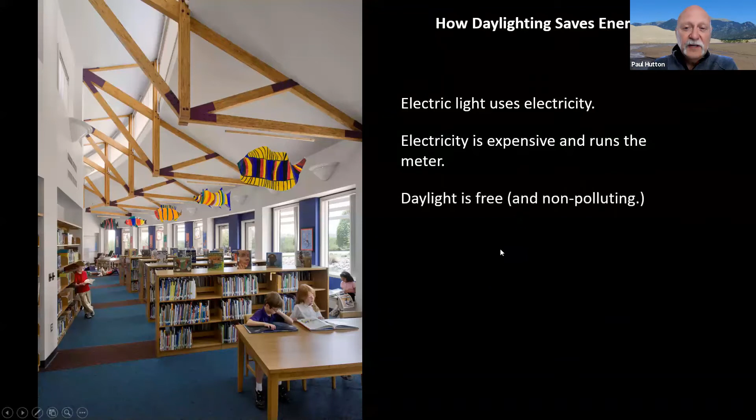Electric light is hotter than daylight. That's a key component, and electric light leads to more air conditioning than daylight. Therefore, the conclusion was that if we did good daylighting with controls, controlled glare and excessive heat gain, we actually could design buildings that were beautiful to be in and resulted in lower energy use. In fact, our typical attitude was that we could save, or hope to save, somewhere around at least 10% of the total energy use of a typical building through careful daylighting. We believe we had pretty good data to demonstrate that. So that is the attitude that I had when I began my career, and that I shared in training and teaching across the country.

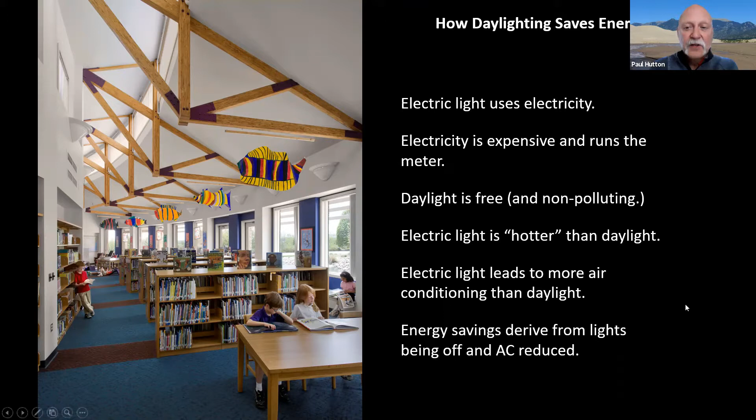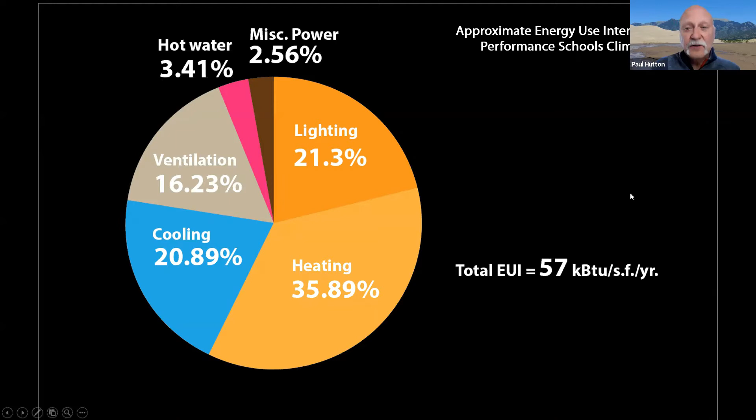So that's what we're going to take a look at today. Here is a pie chart of energy use, not from today, but from a high performance building many years ago, closer to when I was earlier in my career. We can see back then that lighting was a very significant piece of energy use in most buildings. It was almost always more than 20%, sometimes as high as 25% or higher, that went into lighting, and another fairly significant share went into cooling. So of course, if you could cut the lighting drastically through daylighting design and daylight harvesting, with corresponding savings on the cooling side, it wasn't too hard to imagine how you could get to a 10% energy savings in this kind of scenario.

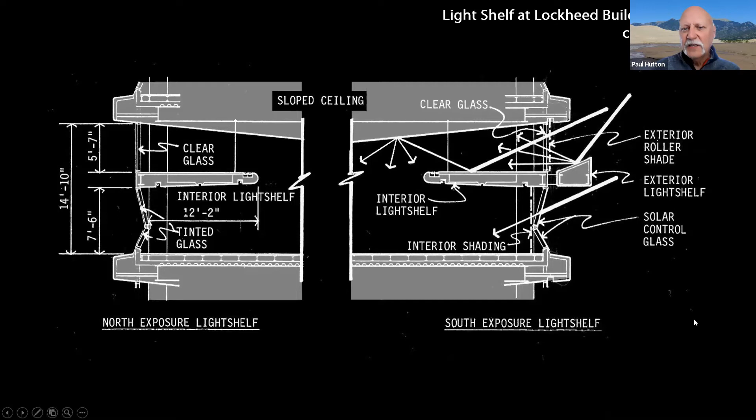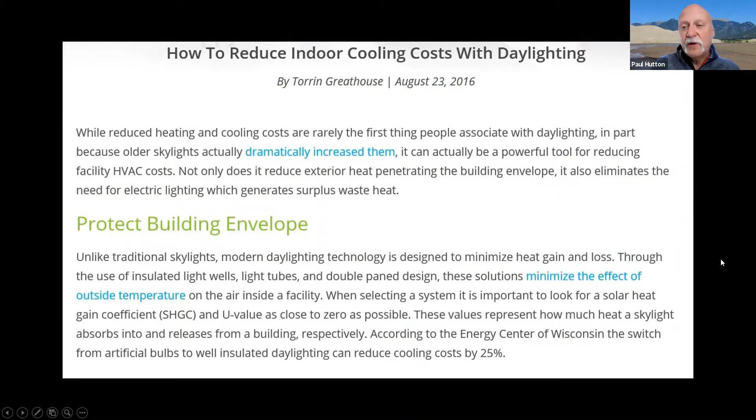So this is what we're wanting to ask: does this really make sense anymore? Embedded in our literature has been a lot of information about daylighting saving energy. This is just a small sampling of the thousands of articles you could still Google and find about daylighting and energy savings in buildings. I'm sure many of you on the call, if not all of you, have seen and come upon these kinds of things. I've been involved in writing some of these kinds of things myself, so I certainly understand the degree to which this has been ingrained in architecture and building design beliefs, that daylighting is a fundamental strategy, and it had been a fundamental strategy.

In fact, if we even look at the AIA Top 10 awards, really the cream of the cream in terms of sustainability design in the United States, what we find is that the designers in their own submittals are still using language that suggests a belief that daylighting is an energy conserving measure. It's still thoroughly embedded and has not yet been revised or updated the way we think it could.

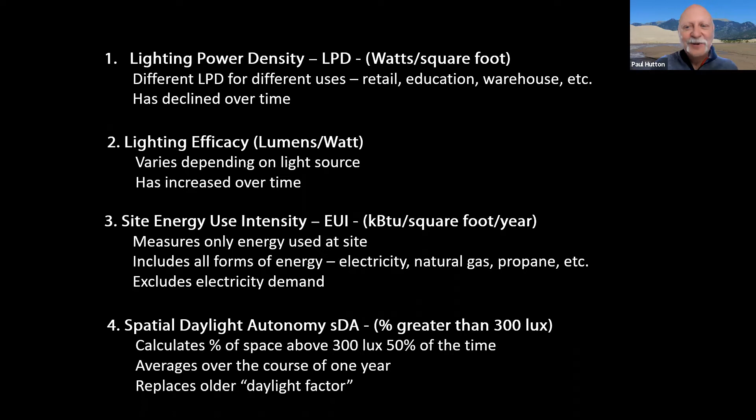So we wanted to mention that this is a slightly technical presentation. Some of it will get fairly technical, so just wanted to mention that there are 4 key terms we're going to use throughout this presentation: lighting power density, or LPD; lighting efficacy, measured in lumens per watt; site energy use intensity, or EUI; and spatial daylight autonomy, SDA. To us, these are fundamental terms that you need to understand to engage in a conversation around energy and daylighting design. If you're not completely familiar with these terms, we suggest you do a little background research. We're not going to take the time to go into in-depth definitions, just wanted to make sure you all knew that we'll be using these terms pretty freely and liberally as we go through the rest of this presentation.

So I'm going to take you on a little history tour. This was the first building that I was project architect and designer on, 35 years ago now. Because I still have the documents, I was able to recalculate lighting power density for this building, which was designed to be energy conserving. Back then, the most efficient we could design lighting with fluorescent technology was about 2 watts per square foot. Most buildings at that time used significantly more, but 2 was about the bare minimum for high quality lighting. That's a lot of watts.

Let's move forward in time, about 13 years later, to another building you saw earlier. Fluorescent technology progressed steadily through the years, not too rapidly, but it progressed. In those 13 years, we went from needing 2 watts a square foot to only 1.4 watts. Fixture designs got better and the lamps themselves offered higher efficacy, so we were able to move closer to 1 watt per square foot.

If we scroll forward a bit more—let me make sure I get this right—10 years after that, we went from 1.4 watts down to 1.2 watts. Again, just steady incremental progress in fixture and lamp technology.

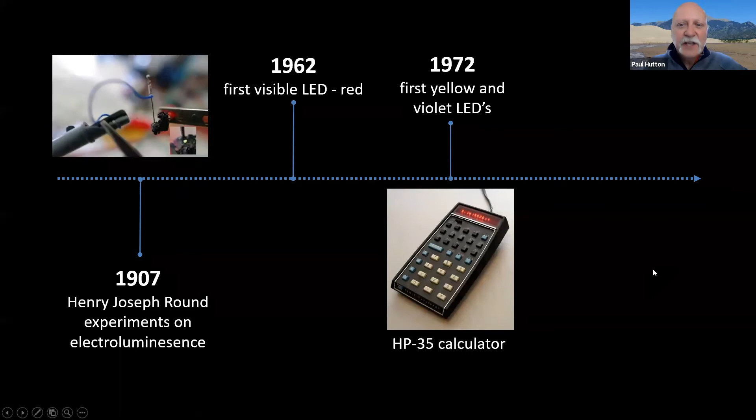Just a quick bit about LED history—I find this fascinating. Most of us don't realize the foundations of LED technology go back more than a century, to early experiments from 1907. The first commercially available application for LED was in those HP-35 calculators; I had one that got me through college. Some of you may remember those, or even had one yourselves. But when those came out, it never occurred to any of us that it would go from that tiny source of light to a source of general illumination like it is today. Pretty incredible, that rapid change.

One thing we like to talk about with lighting design is efficacy. Efficacy is simple: it's how many lumens are output for each watt that goes into the lamp. Here we see the historical development of typical electric lighting sources over time, moving from incandescent to halogen, fluorescent, metal halide, even compact fluorescent. They were all in a fairly narrow range of efficacy, starting around 10 with incandescent and just touching 100 lumens per watt at the very best of our older light sources.

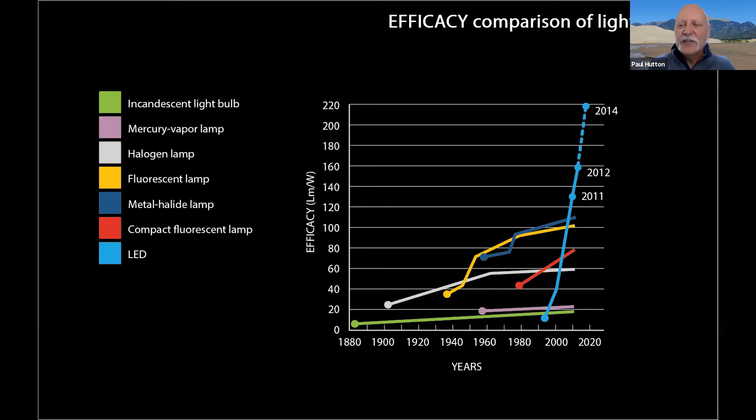But once we get to LED, we see that LED, in a blink of an eye in relative terms, went from not being as efficient as the current incandescent bulbs to nearly doubling the most efficient light source we have anywhere else. In fact, if we look at the theoretical limit, and who knows if that's accurate, but some people say this is a theoretical limit, it might get as high as 268 lumens per watt. That's an incredible level of efficiency.

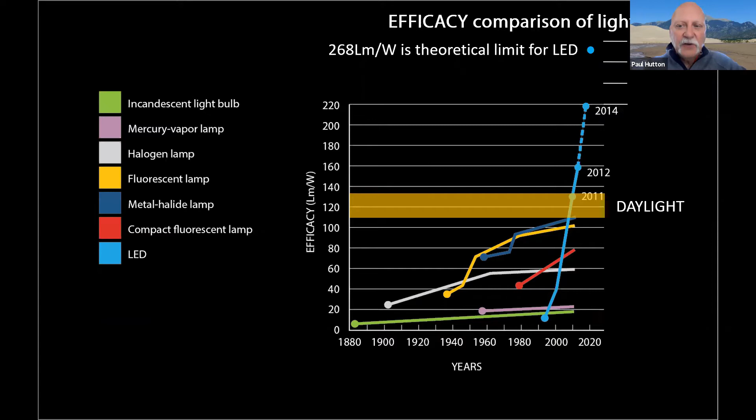And the really important point to make here is this. If we compare the efficacy of daylight, which we can do, to the efficacy of these typical lighting sources, we find that LED is the first electric light source that has an efficacy greater than daylight. That is to say, for every lumen of useful light being delivered, it is bringing fewer watts of heat energy with it. And that's a fundamental shift in thinking about electric lighting sources.

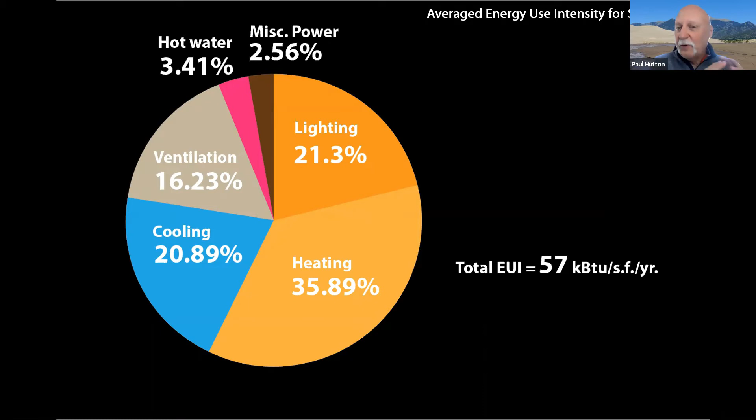And of that smaller energy pie, an even smaller percentage is now going to lighting. We're routinely having buildings where less than 10% of the total energy is going toward lighting. And remember, that pie has gotten smaller too. So the reality is we're spending about a quarter of the amount of energy on lighting that we did a generation ago. And that changes a lot of things.

And Sukreet, I think this is where I turn it over to you. Yep, thanks, Paul.

And so once we looked at all that transition, beautifully explained by Paul in terms of the history, at some point we said, okay, let's try to really dive into and compare and create a correlation between daylighting and energy on our project. So we took a sample office project in climate zone 5B. And what we ended up doing was used it in 4 different cases, one being completely no windows. Second, we had some view windows in it. Third, we had some clerestory windows added to it. Fourth, we said, okay, now it's good daylit from the side, let's also add some lighting from the top.

And we used a current code-based, high-performing type assembly on our project. In fact, beyond code in terms of wall efficiency as well, and created 3 different sides as adiabatic, as if there's a conditioned space around it. So we looked at it in zone 5.

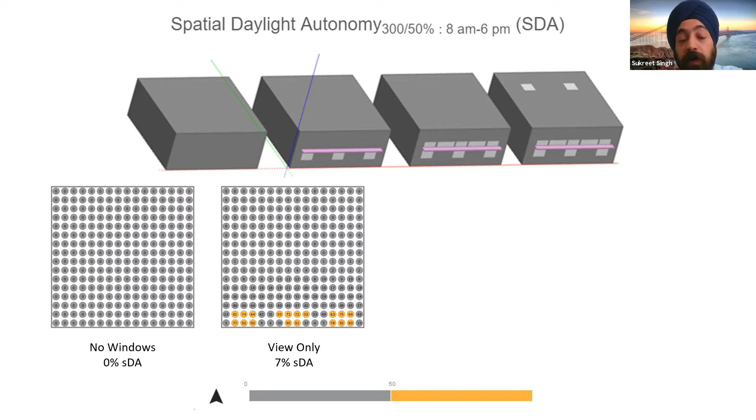We start seeing some areas, now you will start seeing, which has somewhat a good daylight space throughout the year, and we are facing south in this case. And if we move more towards clerestory, you see about 42% of the space now is well lit throughout the year on that side. But there is a portion of that space which is unlit or not as well lit. So once we add our skylights, pretty much the whole space is now well lit.

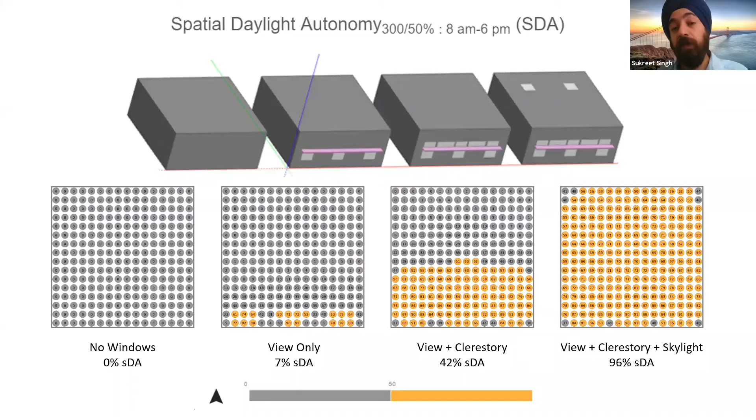So again, this is almost common sense what I just said, but I wanted to emphasize all of this. The more we are adding, the more daylight we are getting, so the better the design gets. Now, this is the skeleton of the next few graphs we are about to see. So I want to make sure I hone in on what we are trying to look at.

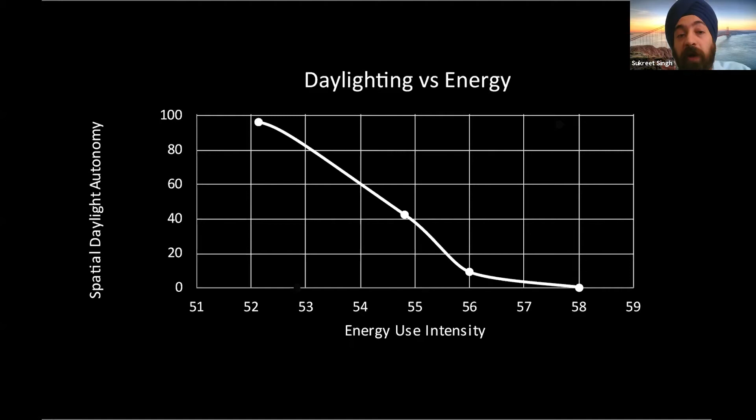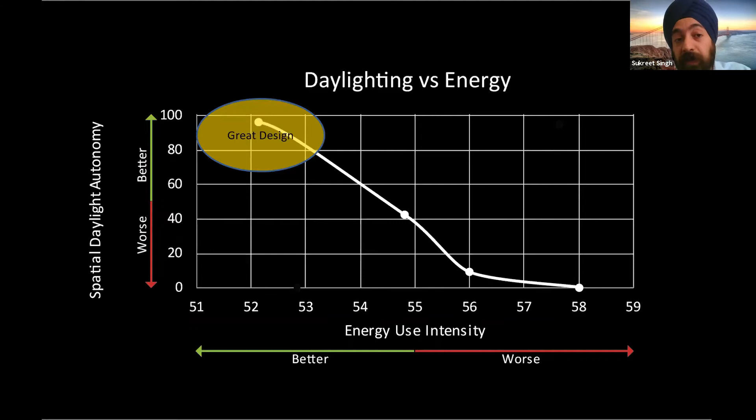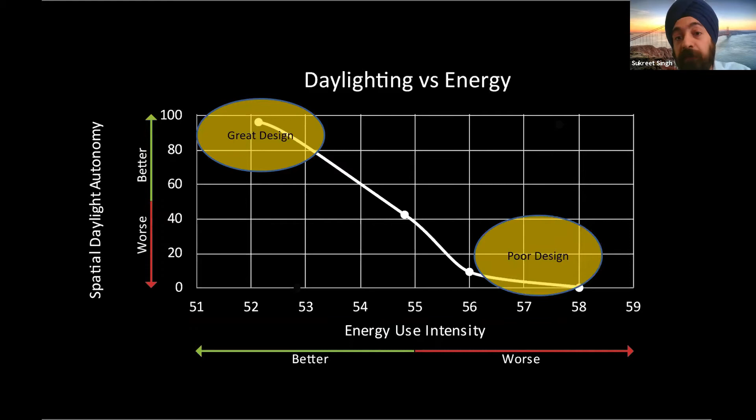So on my x-axis is my energy use intensity. On my y-axis is my daylight autonomy. So just as we all understand, the more the daylight autonomy and the lower the energy use, that's basically a good design, right? So it's worse if I have less autonomy, and if it's more energy, it's worse. That's where my great design really lies. So if I'm not in that quadrant, I don't necessarily have a great design, which would entail a higher amount of daylight and less amount of energy use. Poor design would be in this ballpark, right? If we're trying to compare both of them.

So now if you really look at this graph, we are going back to the era of 1985 first. That's when I wasn't even born and Paul had done his first project. But once we go to that era, we're looking at a lighting power density of 2.0 watts per square foot. So what happens if we are adding apertures to our envelope? So if we had no windows, we were at a particular EUI.

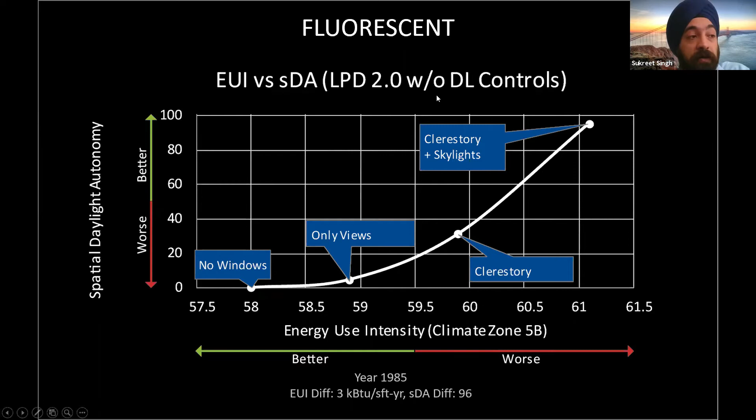If we add views to it, or clerestories, or clerestories with skylights, the energy use comparatively is going higher, because there is a cost to add glazing compared to, say, a typical well-insulated wall assembly, right? So the more glazing we add, the more cost there is. But this is without daylighting controls. But what happens the moment we add daylighting controls?

That graph basically switches. So the graph is telling us that in that era, with a lighting power density of 2 watts per square foot, if you have more watts to displace on your lighting side, the benefit that you will get on your EUI is a lot higher than the penalty you might get from the thermal aspect. So thermal loss, but you're displacing a lot more.

So the main takeaway I'm trying to say is, with daylighting controls my graph used to reverse, and that's when it used to be in that good daylight design and good energy design area, because that is a great design at that point.

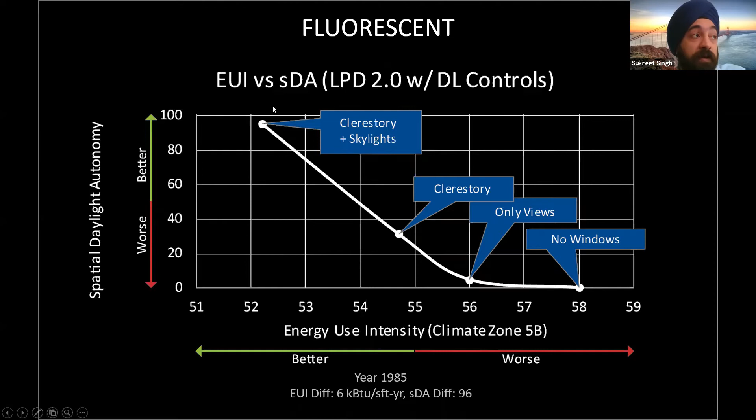But what happens now with all the LEDs and with good design, if we are targeting 0.4 watts per square foot on our projects, or even lower as time progresses? With the same criteria without daylighting controls, if we are adding these apertures into our project, our energy use is slightly going higher with our good daylight design. But what happens if we add daylighting controls to a design which is very well done from the electric lighting perspective? That graph did not reverse.

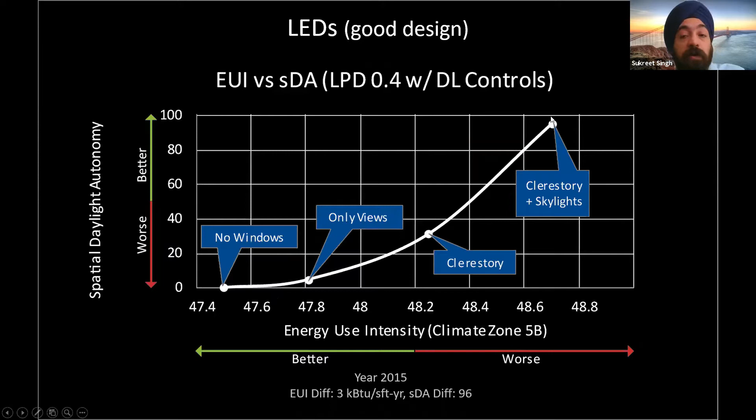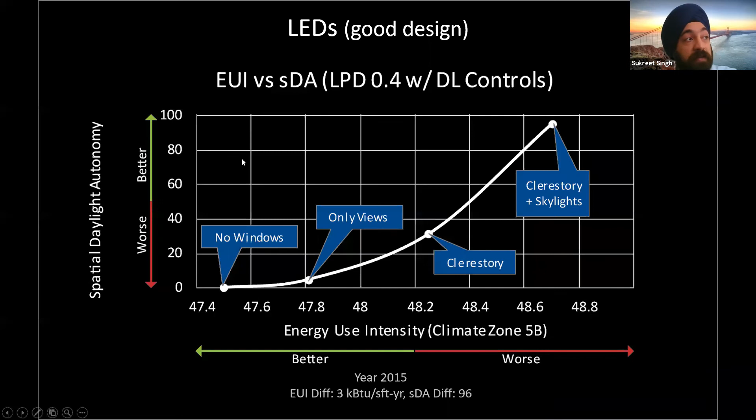In other words, the amount of penalty I was getting from the thermal side did not offset the amount of benefit I would have gotten from the electrical side; offsetting electrical demand did not offset the amount of penalty I was getting. So that tells us that the graph is no longer reversing. So the way it used to be on the good design side doesn't really exist, because that's where my good design is, and I am in this particular quadrant.

Now, some of you who are really good at looking at the numbers on the axis would have realized one thing, that my x-axis numbers changed in the two graphs I just showed you. Now, this is both with fluorescent and LEDs, but with daylighting controls. We saw the more clerestories and skylights we are adding, we have a lower energy use, right?

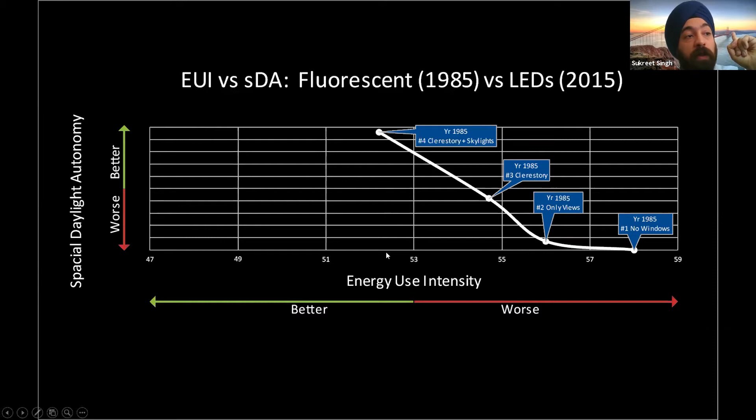But now if we look at it from a complete LED perspective, adding any of those clerestories and skylights, it's not reversing, but if you really look at the overall EUI reduction, that is much more reduced on that side, just because we changed the lighting power density.

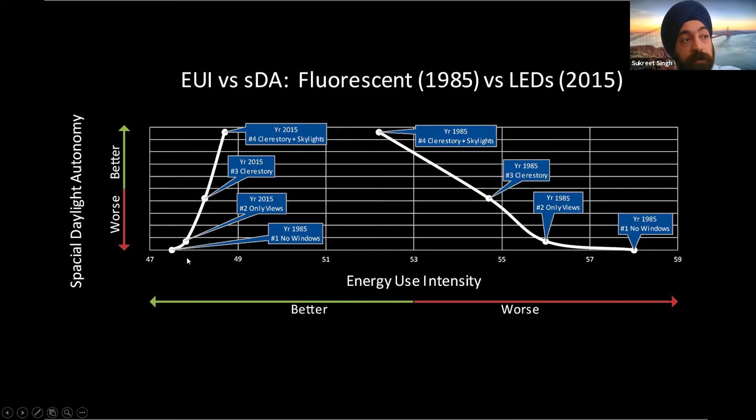So overall, we are using a lot less, but that graph trend is not reversing either. It's more of a flat line if we see it from that perspective. So that's a trend in the shift that has happened in the recent past.

We took it one step further and we said, let's look at the payback calculations on this side. So there is a cost to add a clerestory window. There is a cost to add our skylights. So if we are adding those to our architectural design, we estimated that was about $3.4 a square foot in this area. And we also used the Colorado utility rates to offset what that would be.

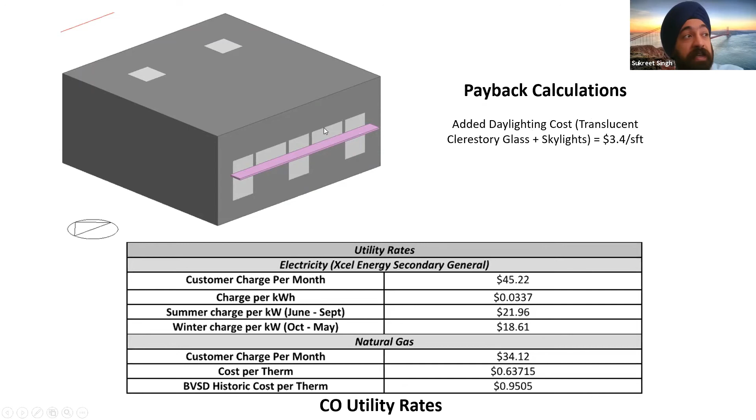But then we also knew Colorado is not as aggressive in terms of utility rates as California. So then we explored what happens in California. So the same sort of payback that we used to see in 7 years for that added cost for clerestory and skylight diminished to over 25 years, even in California, if we are below 0.5 watts per square foot in terms of our lighting power density.

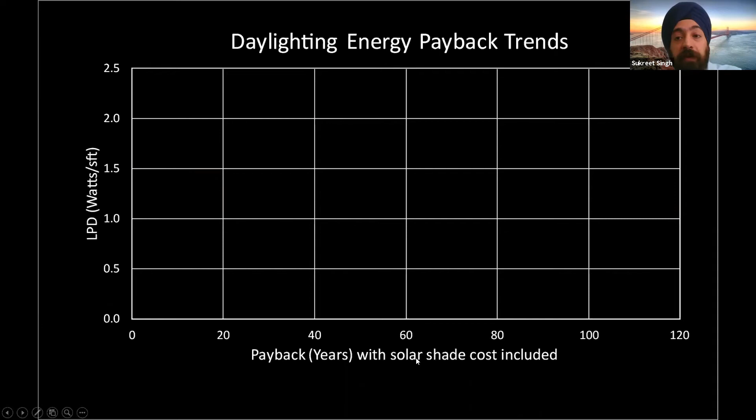And then we also looked at it if we add solar shade costs to it, that's another expense. The moment we add not only clerestory and skylight, but also sunshades, those sunshades take those to even more number of years. So there is a particular cost if we are really making it from the same judgmental points that we did.

So where does it really take us? Are we really saying it doesn't make sense to do daylight at all? Or are we saying we just have to rethink it? So I will hand it back to you, Paul, to take it further.

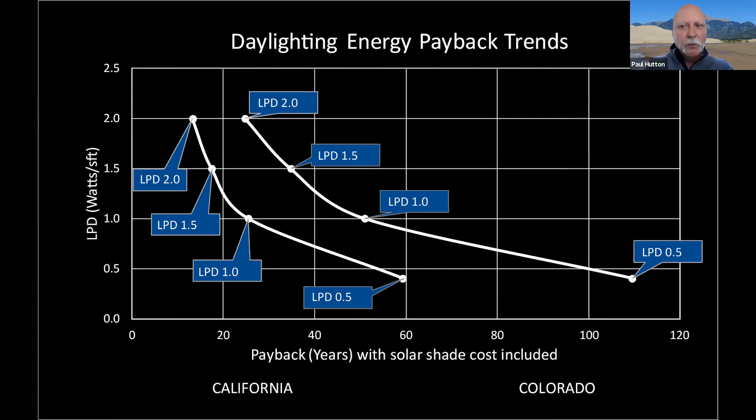Thanks. Appreciate that incredible in-depth analysis. I remember the first time I saw that, I was just amazed at the clarity with which these graphics and your analysis could illustrate what we were beginning to wonder about intuitively. So thank you again for a lot of time that you put into that. So let's see, I think I have control again. Let me test it right now.

So if there's not a strong incentive in energy savings and utility cost reduction to doing daylighting in our buildings, why do we still want to do it? And I would argue there are still incredibly important reasons that support doing daylighting design. By no means are we advocating not doing daylighting, which is something that came up at our Greenbuild presentation. We just think we should do daylighting for different reasons, and that might change how we implement it.

And of course, those reasons have completely to do with a human need, psychologically and physically, biologically, for daylight. We grew up under daylight. It's the source of light that nurtured us and under which we evolved, and we have a strong need for it. And so, as there was in the literature lots of information about how daylighting used to save energy, today there's tremendous amounts of information about how daylighting is good for you, especially inside buildings.

So I'm just going to scroll through a small sampling of what you could Google if you were to look around. Oh, I went a little too fast there. Sorry. You went all the way to the end, Paul. What's that? You went all the way to the end. Sorry. Yeah. Not sure what happened. Okay, so I'm just going to try to scroll one.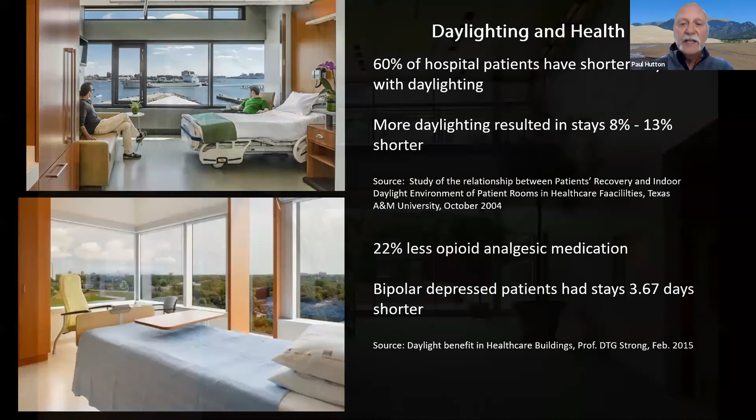In the realm of healthcare, there's even a greater abundance of research. Some of the things we now understand are that patients recover more quickly, they need less pain medication, and they get out of the hospital faster. All of these things relate directly to having quality daylight and views in our healthcare institutions. So we've got really solid research that we can point to when we tell our clients we think it's important to still do daylighting design.

So let's dig in a little bit. Why is it that daylighting has such profound benefits? I think the answer is fairly simple.

Let's start with the issue of view. Most things that bring daylight into buildings also provide views back out to nature. That need for biophilia, or connection to natural elements, is so profound that we believe when we provide these kinds of views from inside our buildings to allow occupants to connect with nature, it brings tremendous benefits. So although we are not designing our buildings anymore to provide daylight to every square foot, we are thinking very systematically about how every occupied space in a building can have a view outside. And we think that is no less important now than it ever was. In fact, we could make the case that it's even more important.

So I just want to refresh your memory. This is a building from only 10 years ago. At that time, we were still focused on equity of daylight—delivering as much light to the ground floor as to top floors. We were doing things like you see in this diagram, where we took a tubular daylight device and made it 25 feet long from roof to ground floor with two 90-degree bends. We actually delivered pretty nice daylight doing these kinds of things, but with today's perspective, I look at this and say that's unnecessary—probably a greater expense and more effort than is justified by the results we're getting, either from the human performance side or from the energy saving side.

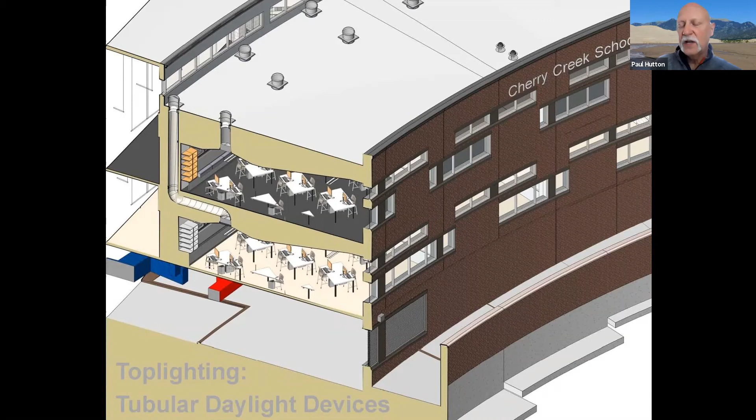So that's why we're using schools for purposes of illustration. Here's a relatively recent school designed on 21st century learning principles with learning communities, but that's not the real point. If I look at a typical classroom, only about half of it is in the defined daylighting zone—the other half is not. The point I want to make is that if I'm sitting in the non-daylighted zone portion of that classroom, I still have an excellent view out. I still have the benefit of that spectrum of daylight coming into this space, and that's what's important to us.

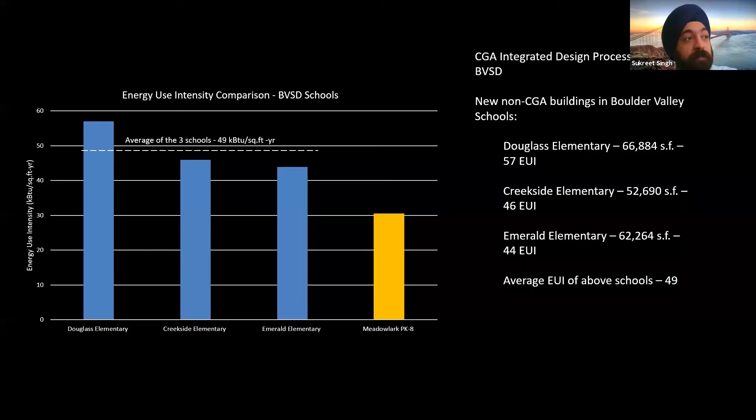Paul, are you sure that our energy use did not go up because of all of this? That's an excellent question, I'm so glad you asked me that, Sukreet. Of course there's an answer for that. The building we're sharing with you was part of a bond issue that had 4 brand new buildings, all on the same schedule, all with similar design construction team capability, all with similar budgets for construction per square foot. Sorry about that, I should have turned that off.

And here are the results. I should have said, all 4 buildings had an energy use intensity target of 25 kBTUs a square foot a year, that was a district target that they gave us. Here are the operating results from the last 3 years from those 4 buildings.

The 3 buildings in blue are the other buildings that we did not work on, Sukreet and I and the rest of our team. The building in yellow is performing right at 30 kBTUs per square foot per year. Remember, we modeled it at 28. The district target was 25. It is the only one of the 4 new buildings that is anywhere close to meeting its target, and again it's doing it in real time, in real life conditions. This building, compared to its new competitors, saves the district $600,000 over the first 30 years of its life.

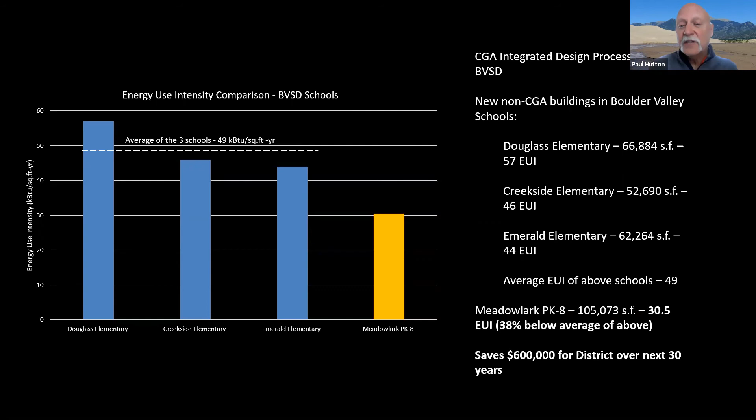So we're using this building to make the point that needless complication in daylighting and daylighting controls is not necessary to achieve high levels of energy performance. In fact, sometimes it may be the opposite, because you're going to take dollars away from other potential strategies that may have a better return on investment. Do we have one more slide, Sukreet? No, I think that was our conclusion.

So we've gotten through our content. I think we are right on time, within a minute. And so at this point, we're ready to respond to any questions that you may have.

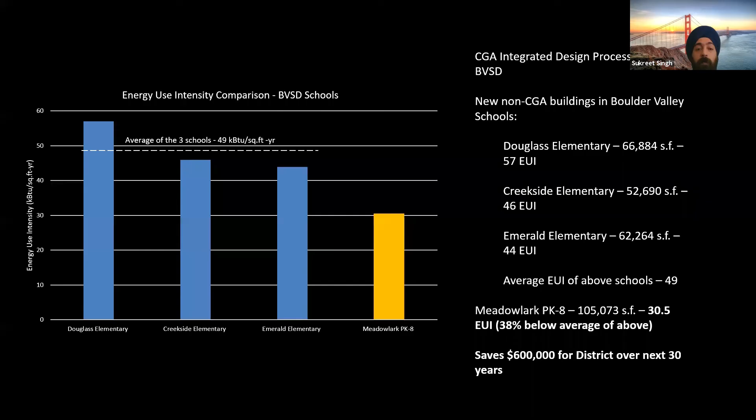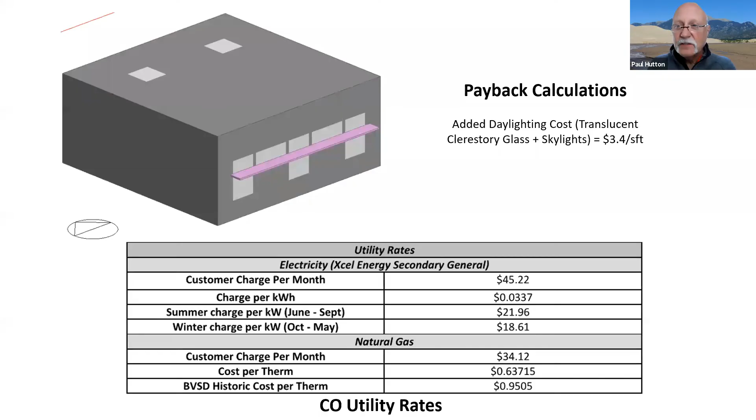The blinds down scenario is really an interesting conversation to have, because as we do daylighting design, we tend to do the analysis ignoring blinds or window coverings. And in reality, those are so necessary for occupants to control glare and make those spaces habitable for themselves. So we actually talk a lot about the issue of how to model blinds down, whether to model blinds down, and what kind of window coverings are really going to provide the best performance. I see, Sukreet, you're sharing now what the model inputs and assumptions were in the slide, correct?

Well, Paul, that brings up something I was interested in. What about glare? It seems like there's a big difference between providing something that's mainly horizontal illuminance and providing a light source that can sometimes be largely vertical illuminance.

I think Sukreet wants to answer that. Sorry, can you ask that again, Nathan? What about glare? So that's why when we were working with this and said that it is good daylight design to have a translucent clerestory, we actually meant it, because that's when you can actually have reduced glare. And once we are looking just at the view aspect of it, we would not have the blinds open if it is a glary condition.

Having said that, if the blinds are down, it reduces my daylight autonomy. Not directly daylight autonomy, but overall well daylit space within the aspect. We were looking at it from a best case scenario, where my blinds are never down and I always have a good amount of light coming in. The crux of the study was focusing on that scenario, the best case for energy efficiency from daylighting savings. Do we still make the cut? We didn't, from that perspective.

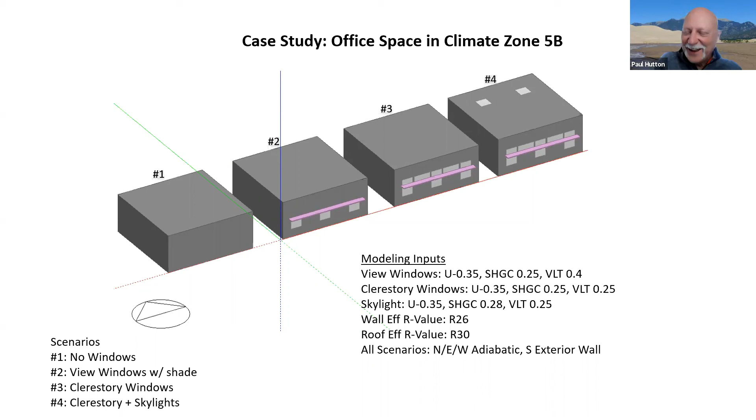I wanted to broaden it a little and share that for Sukreet and myself, it's a constant conversation with our building designers over glazing specification, because designers seem to want glass that's as bright and light transmitting as possible. We are always pushing back on that, trying to get the glass to be less glary. So that's a constant push and pull.

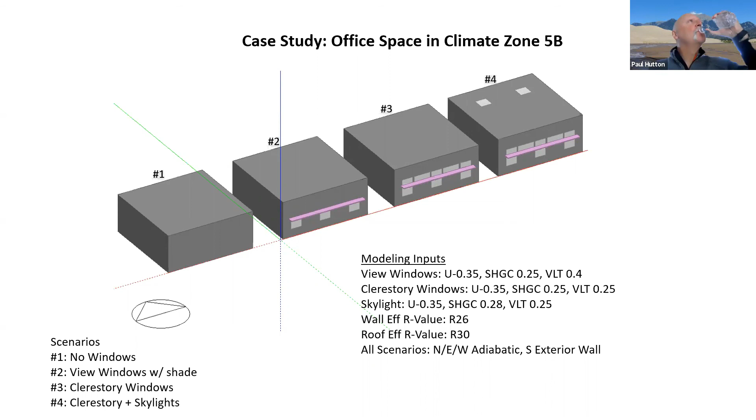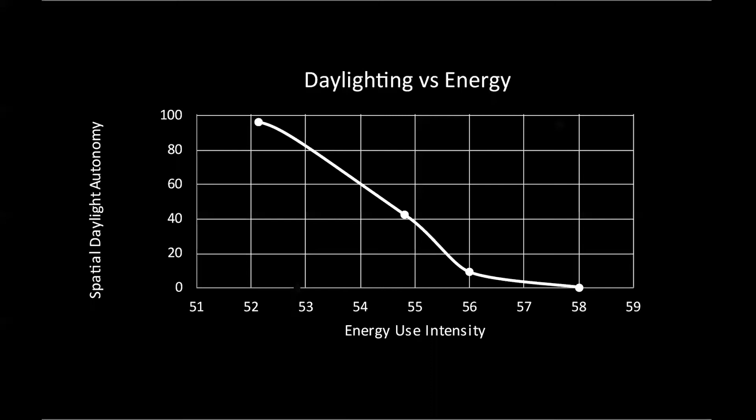Right, thank you. I see we have a question coming in from Anna. Anna, do you want to ask your question? Sure, can you hear me? Yes, yep. I just wanted to see if Paul, you could go over again how you were able to not install daylight sensors in that example you showed. I didn't quite understand the approach you were suggesting to use.

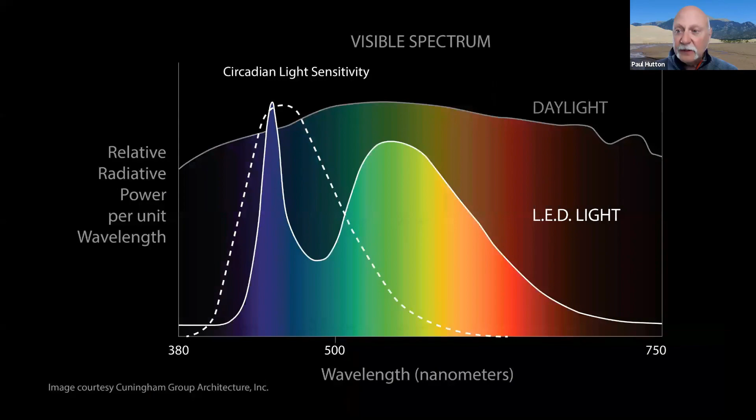Yeah, it's a good question. If you dig into the code, what you find is... Sukreet, why don't you take this from me? I'm going to have a little more water. I know you've got this one too. So the approach there was, Anna, that we looked at, okay, well what does the code actually ask us?

This was more in the schematic design and DD design aspect of it. We were looking at how all of these spaces would have to be controlled through daylight controls based on how the IECC code is written right now. Talking to the owner and our internal team, we wanted to get away from that and just have level down, manual-if-needed controls for those spaces rather than daylit controls. Once we looked at the whole sketch, we realized all of this would have to be separated, at least part of that zone would have to be controlled separately than the rest of the classroom, and it doesn't give us an option to just control the whole thing as one with manual dimming. So once we realized that, we actually changed how that daylit zone was being discussed.

We said, well, we just have to break it down to a point that none of that daylit zone is more than 150 watts. We did that by bifurcating our glazing, the dimensions of that glazing, to be first of all more than 4 feet, and then whatever space was left. So we were designing it from that perspective so we could break those zones out and not have to add controls.

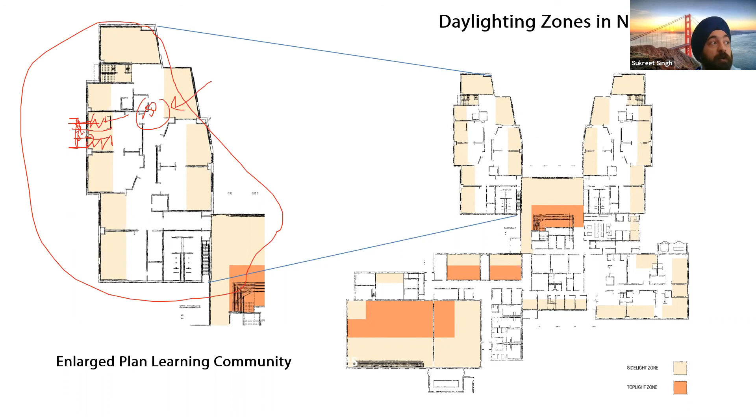So in this case, none of this ever has any daylighting controls, even though the code would technically require it if we hadn't placed the glazing the way it was supposed to be. The code makes clear the daylighting zone extends 2 feet past the jamb, left and right, either side of the aperture. So by having a 4 foot or 4 foot 1 inch piece of solid wall between jambs, that actually separates the daylighting zones. And because LED is so efficient, what we found is that almost always we're under 150 watts of electric lighting in that zone.

So just how you creatively think about the window patterning on the outside of the building enabled us to do this simplified control strategy. So can you just quickly confirm though that there'd be lights on in that zone while it's being daylit?

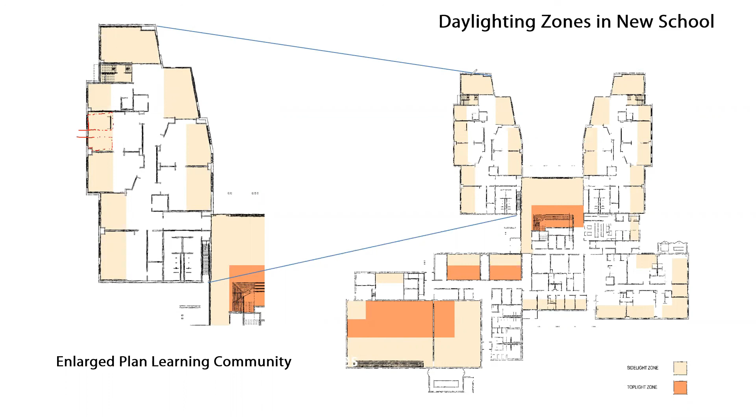Is that what you're suggesting? There would be, okay, the option of the teacher. So the teacher has a slide dimmer for the daylight zone and the non-daylight zone, although not required by code. We just wanted to give that option. And so in this building, we're dependent on occupant training and responsiveness to do that.

I'll call it daylight harvesting, but really the big point, remember, when you've only got 0.4 of a watt to displace, there's so few watts that you can harvest, it's just not a big deal. We're just not seeing it play out in terms of the actual energy performance of the building, especially when you compare to the cost of the controls.

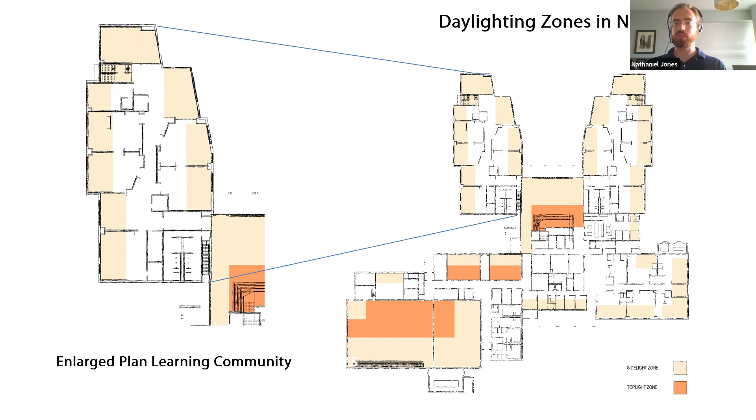I'd like to follow up on that question a little. You mentioned the 2 foot reach beyond the edge of the glazing. Does that, in your experience, line up with the occupant perception of daylight, or do you think that's more a way of playing with the code to try to get your scheme to fit the rules? Great, yeah.

That was something I worried about quite a bit because this was the first building where we did this. Since then, we have done this strategy on another half a dozen buildings. And I was a little bit worried about that 4 foot gap in the daylighting aperture. But in experience, I've actually found that it does not create any kind of bothersome interruption of daylighting in view.

I found that our clients and occupants just accept that as a normal feature. And in fact, over time, I find they find all kinds of ways to use that nice extra piece of solid wall. Surprisingly, it has not turned into an issue in terms of the quality of the daylight for us.